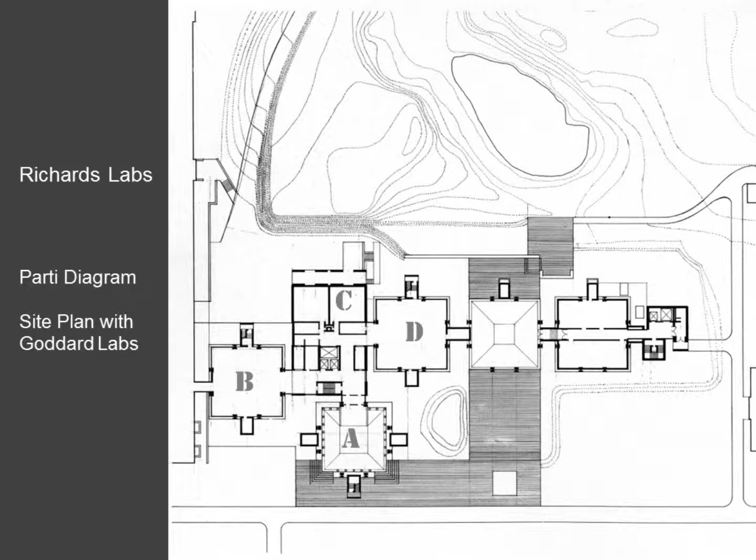But it's the idea of the servant - I'll just do it on this one side, and I apologize to the people over there because I know that's where I've been sitting. This is the servant, and these are the served. So you basically have essentially a brick box here, and these highly glazed towers surrounding it.

Okay, it's not advancing though. Okay, there we go, sorry.

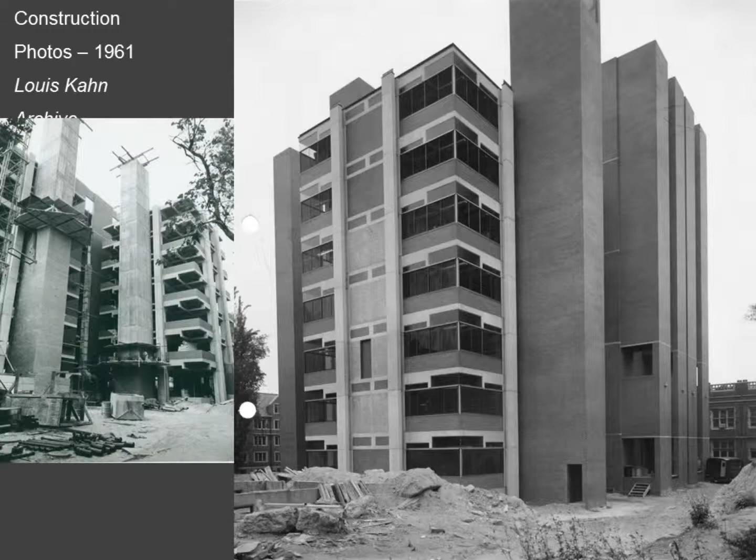Here's the building under construction. Kahn was very heavily influenced in the design of the structure by August Komendant. This was his first collaboration with Komendant, a visionary structural engineer who worked for 18 years with Louis Kahn and wrote a tell-all book about it some years ago. Here you see the building going up, and the strong expression of this reinforced concrete structure with precast Vierendeel trusses, which cantilever off the columns that form the centers of each of the served bays. The purpose was to open it up to the world at large, but also, in Kahn's notion of creating community, to be able to see into each other's lab, to have this communication that is evident in this wonderful photo by Mildred Schmertz shortly after the building opened.

The idea that these enormous windows allow light and quality to permeate from one side to the other.

Here you see the actual plan, and something important to remember, though we won't go into it in this presentation, is that the interior partition layouts within the glazed towers really were of no consequence to Kahn himself. His preference was to keep them all open.

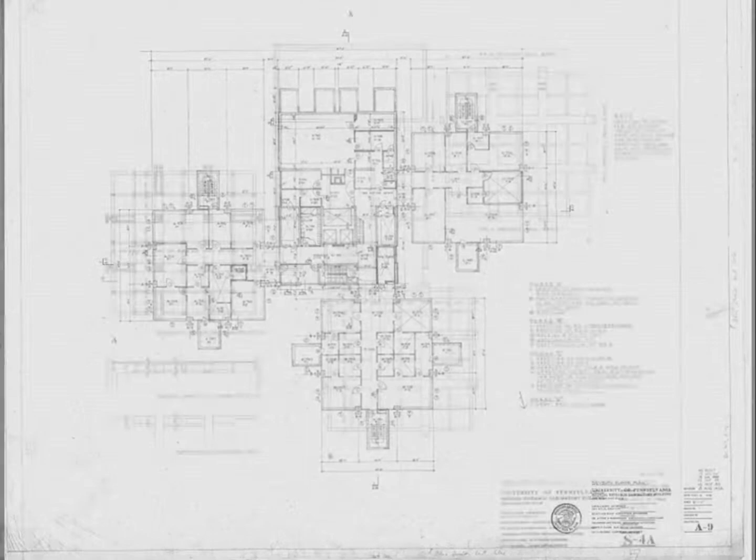However, the partitions did conform to a system aligned with the structural grid. Here is a reflected structural plan of a typical floor, and you see these four squares within the nine squares of each of the corners.

One of the things we had to face was that if you follow those lines, they don't meet Penn office standards—that's a presentation for another time—but it was a very interesting challenge figuring out how to deal with that in coming up with new schemes for the interiors of the building.

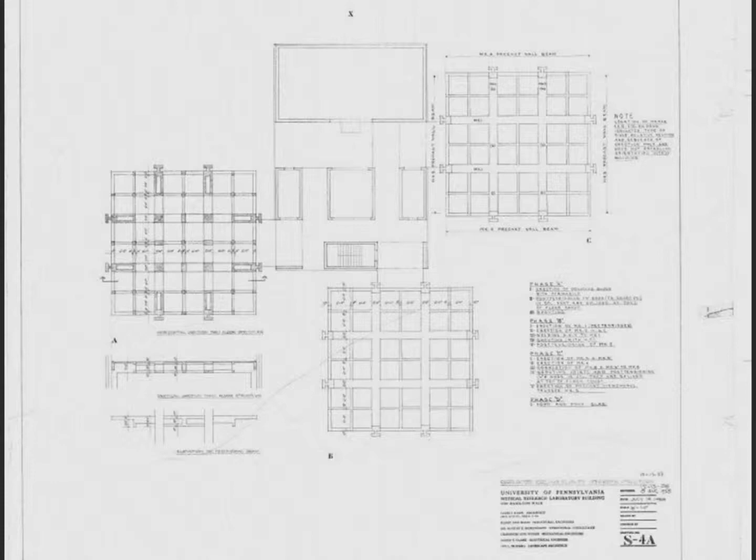And here, finally for this introductory piece, is the sort of tinker-toy pieces in construction going together. You can see the extent of the cantilevers here, and part of that movement, because of concrete creep in those cantilevers and the expansion of the brick, are some of the things we had to deal with in facing the changes to the glazing later on.

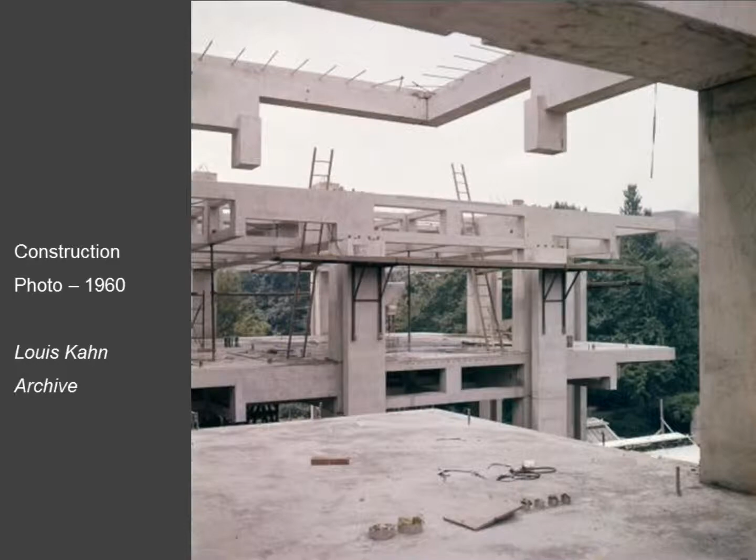As David said, there were functional problems from day one, but this, another one of these almost-construction finish photos, certainly gives a sense of what Kahn thought the spaces should look like on the interior. This is actually looking into Tower D from Tower C, so from the servant to the served towers.

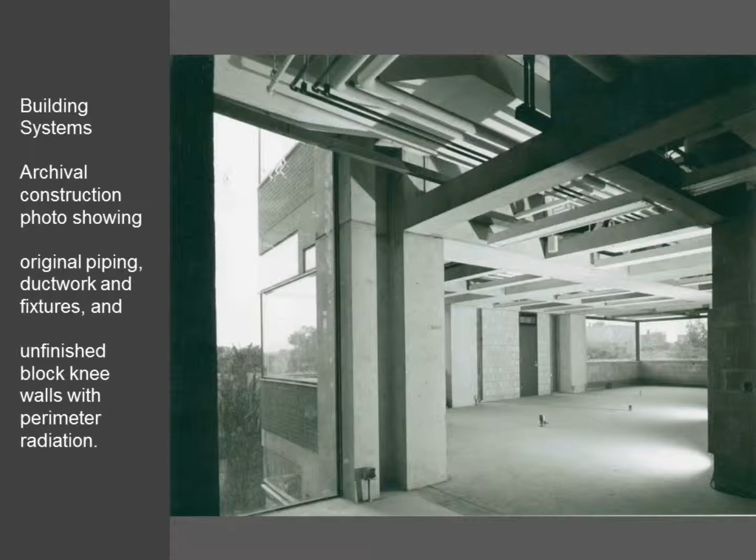You can also see in this image, in the Vierendeel truss system above, the organization of some of the mechanical systems that fed the building, which I'm going to talk about a little because it was also very important to the vision of the building. But this is what we were faced with going into the building.

As David said, this incredibly important planarity of the exterior envelope and the way the materials met each other has been partially compromised based on minor movements, particularly around the corners of the building as it relates to the windows.

A critical element of—excuse me for a moment.

A critical decision that the university made prior to our even engagement was to change from wet labs to cognitive neuroscience in this building, which took out a lot of the systems pressure on the building and allowed us a lot of freedom in terms of how we were going to design the building and its systems.

Our scope of work included an initial feasibility study and then renovation of just two floors of two of the towers. It was a limited scope, although they've now moved into a full renovation of the entire building.

Penn was not prescriptive about the solutions they wanted, but they did provide a sense of their expectations. Just from the RFP, they stressed high sensitivity and coordination between historic preservation, mechanical engineering, and space planning, and that the design should result in a high-performance, energy-frugal, light-filled, and healthy building.

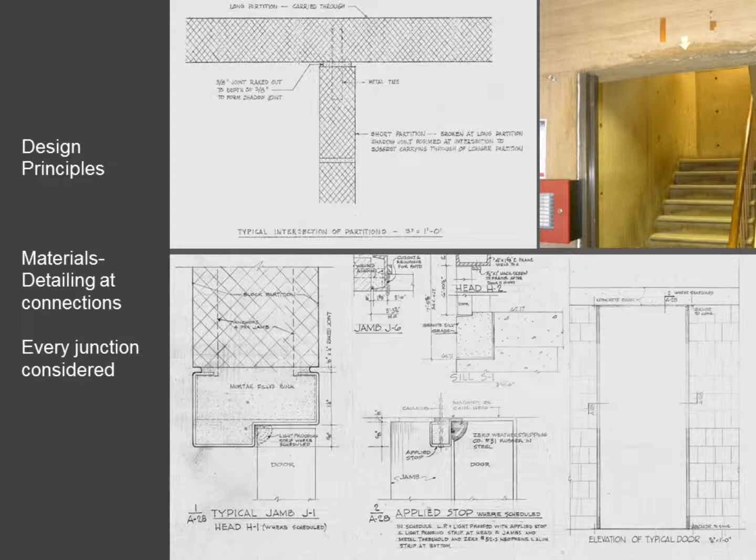One of the things we learned in the feasibility study was that to really guide us in dealing with the building, we had to think about some basic design principles that Kahn and his team developed. One of these was how all the materials in the building, the junctions between them, how they meet each other, and how they terminate. These are snippets from the original construction drawings, showing how two cinder block walls would meet, and the typical door head and window, where you really only have jambs and no head to the window. It really simplifies the lines of the building, and it was something we always had to keep in mind.

On the mechanical systems, what was really critical is that they were treated as a visual element in the building. Kahn stressed the idea that the architect should understand everything about the structure, the systems, and construction technology, because it all had to be integrated into a whole. It was not thought of as separate components.

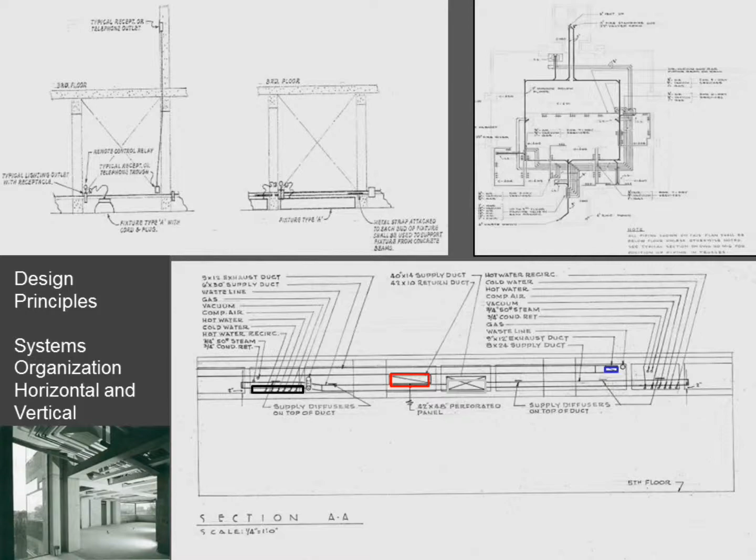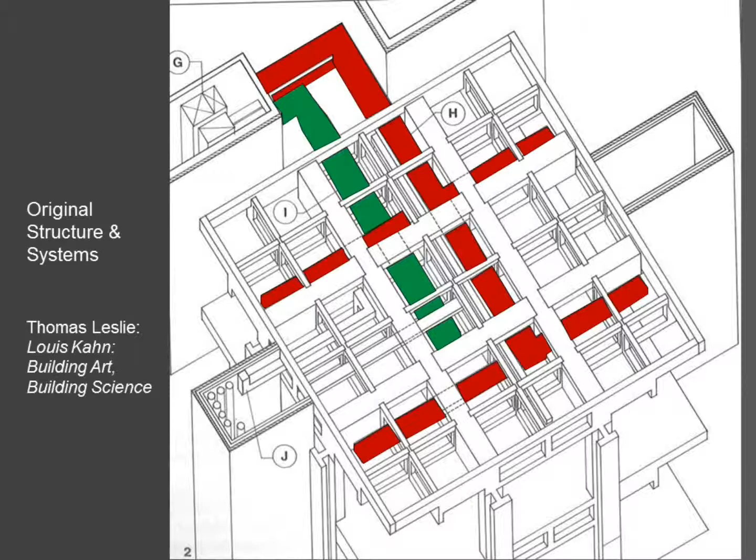The layering of the mechanical systems, shown in the section at the bottom of the screen, shows how the systems were layered in the Vierendeel trusses, one, to highly organize them visually, but also to allow the systems to feed up to the floor above for electrical and telephone, and for the mechanical systems to feed the level below. That meant no systems had to go through the zone created horizontally by the windows - a very important issue. This diagram is from Tom Leslie's book, Louis Kahn: Building Art, Building Science, and it shows the rigor of the layout of the systems and how it was worked into the Vierendeel trusses, which again was something we had to pay close attention to because we were changing the building systems, but had to think about what that meant for these designs.

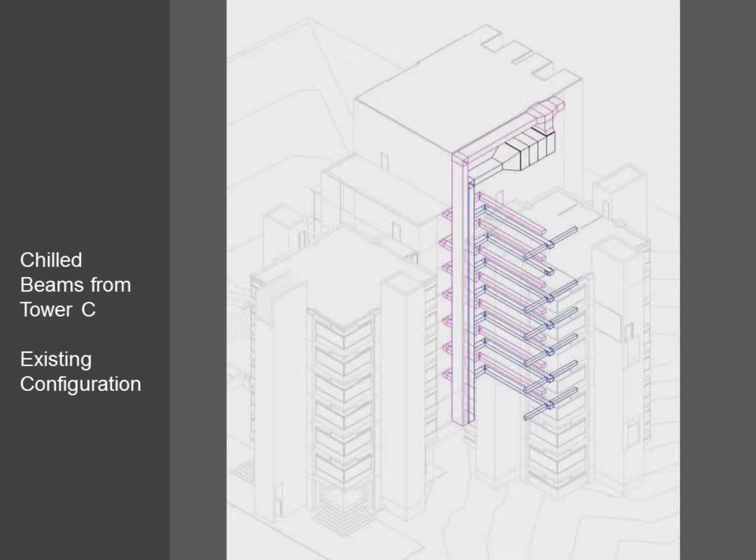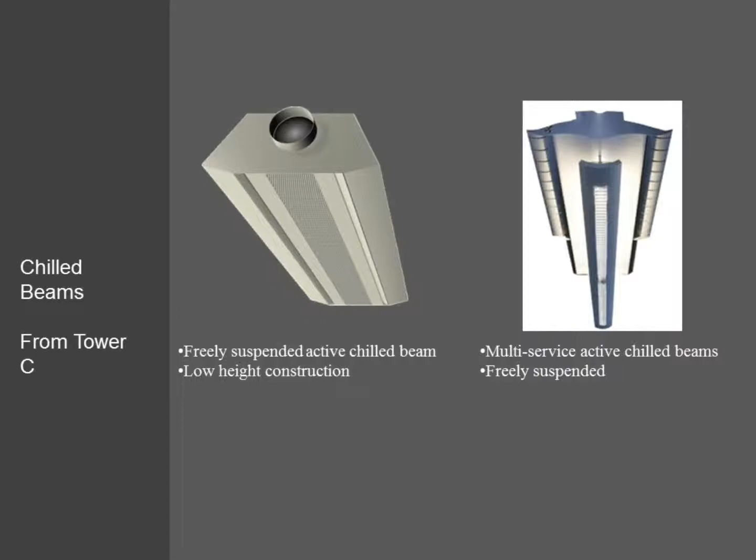One of the key things the university wanted to explore was changing from their standard HVAC VAV systems to chilled beam systems. The benefit of this was both energy savings and further reduction in the size of some of the ductwork and routing, which simplified coordination issues for us, and also had offshoot benefits specifically related to the window design. It also posed a problem, though, since we're going to have new objects in the space - what were they going to look like? There's not a lot of range of chilled beams available in the market, so again we had to think about how they would lay out in the building.

We did all of the layout design of the systems in Revit. We used it as a design tool, and we would actually use it in design meetings with the owner to understand exactly, visually, how this was going to look in the building.

Given all of the chatter happening in the 1950s and 60s about making very minimalist curtain walls, nobody really talks about just how good a job Kahn did in achieving precisely that.

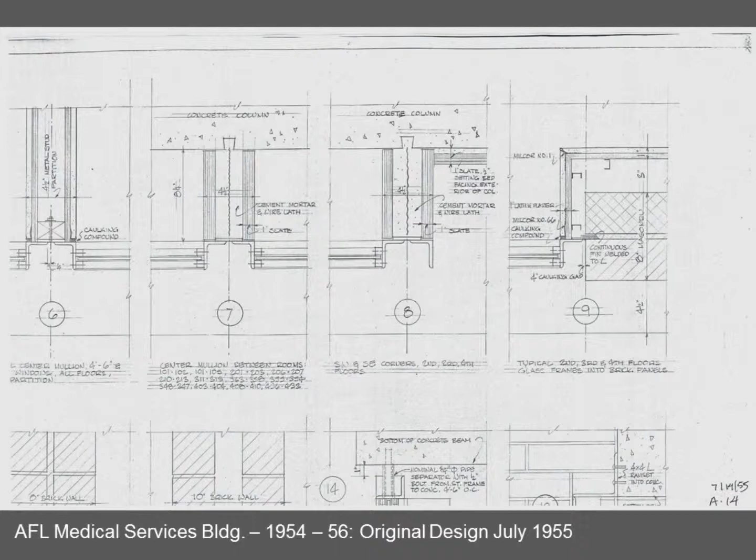These are details showing the evolution of Kahn's thinking about windows. These are steel windows in the first proposal for the AFL building, similar to the steel windows he did at the Yale Art Gallery, a building he had finished right before that. But as he's working through the design, he also proposes an aluminum alternate, and then finally goes forward with a folded plate brake metal stainless steel system.

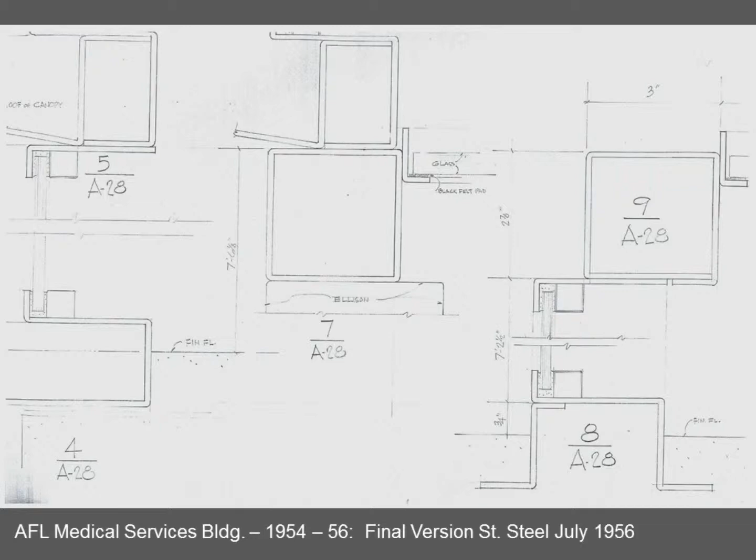Here are the design drawings, and then here are detailed drawings from the actual construction and submittals that went through into construction. So he's thinking very hard about this, working on this idea of creating this incredibly sheer surface, because there are no tubes, the sections are very light, and they get all their strength from just being folded.

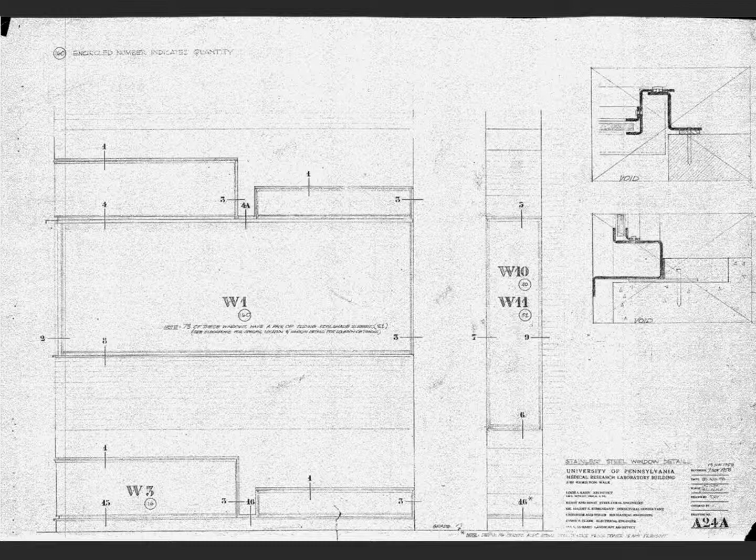The only real projection from the surface is where they had tracks for exterior shades and a very minimal drip. This shows some of the details more fully developed—you see with the cool shade on the left, that's the tracks that overhang, and this very elegant corner mullion.

One of the things people always talk about when we say we're working on this is, oh yeah, that's the building covered with tinfoil, because there was very little in the way of sun control that went along with this, and that was part of our mandate.

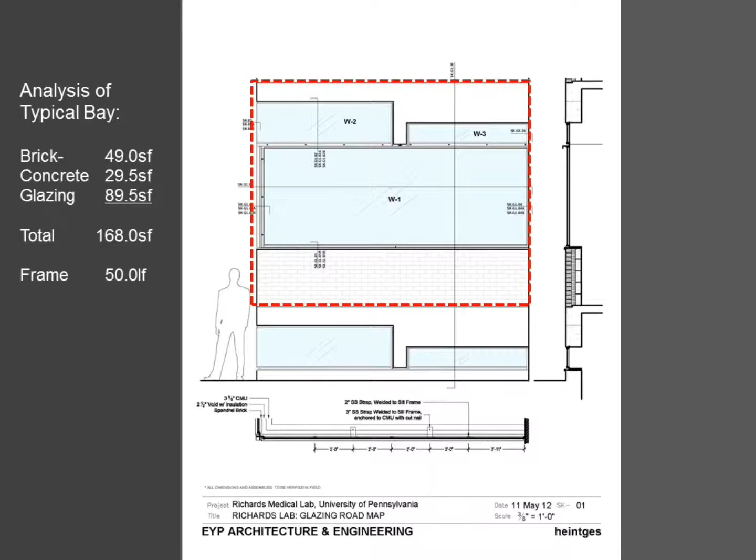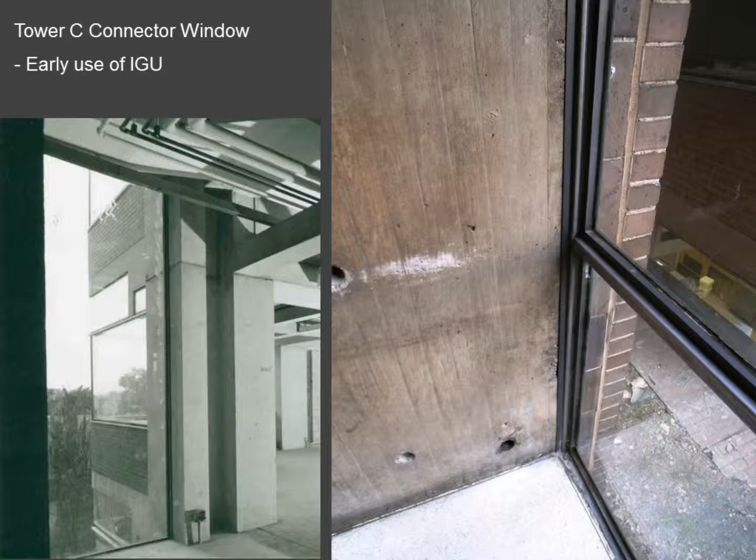One thing I want to point out briefly is that there is also, in the slots between the towers, a very early use of an IGU. These have welded metal seams, and most of them—not all, but most—have held up very well, certainly better than you'd expect a contemporary IGU being 52, 53 years down the road.

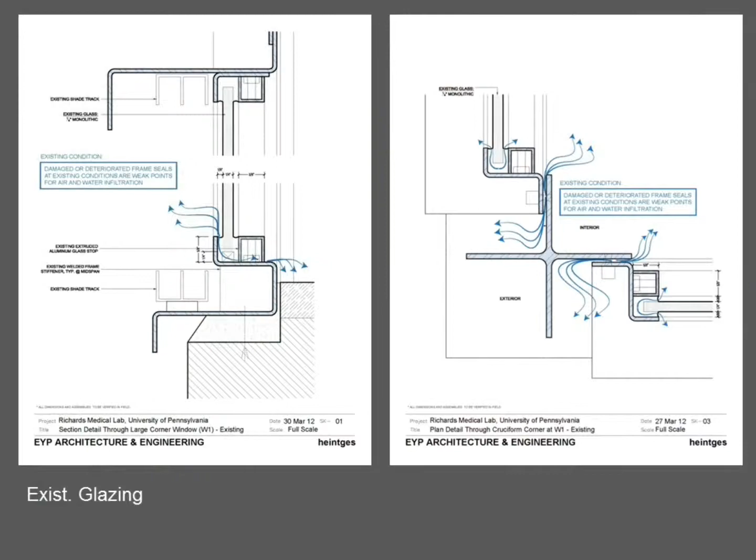Looking again at the existing condition, a typical section on the left, typical plan, with that very elegant corner on the right, and obviously a big energy sink.

One of the things we had to do, since Penn, like many institutions, is trying to adhere to a mandate to achieve 30% energy reduction in a fairly short period of time. There's a large number of universities around the country that have signed on to this, and they're looking at every project with the idea of what can we do to be as frugal as possible. They weren't demanding, but they said you have to explore every alternative.

So we did look. We said, okay, can we somehow mimic these profiles in a thermally broken frame? Well, there are three problems with this.

One issue is the frame is a little bulkier, or maybe way bulkier, than we would want it to be. Two, and most important, you're having to rip out the original frame, which means you are disrupting both the concrete frame and the brick infill around it. And three, you still have the problem at the corner of the lack of a thermal break. So it's never going to be a perfect solution.

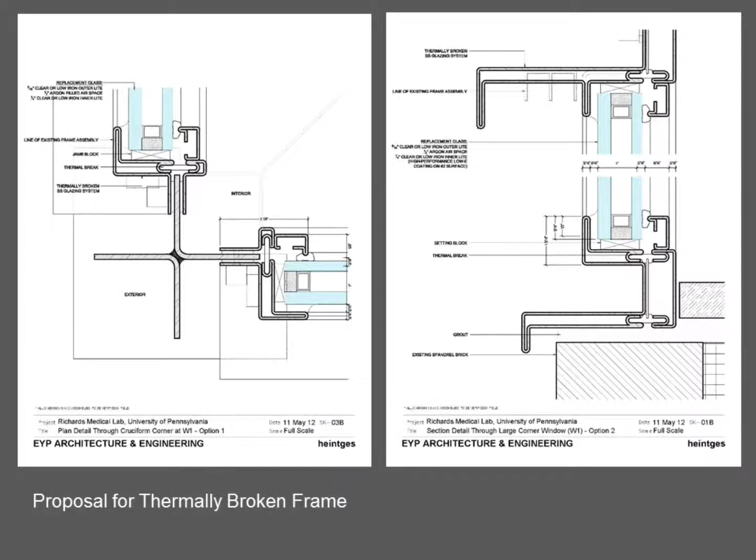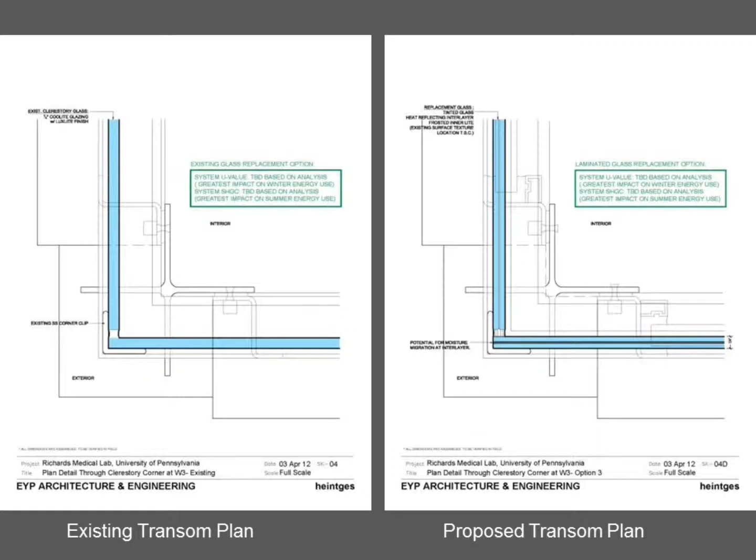Here at the transom, one of the things we had to deal with with the laminated glass, which you see on the right, was worries about the possible exposure of that piece of film at the intersection between the two lights. We did some testing on that, and it was determined not to be an issue with the glass, so we went forward with that.

Just quickly, we did do energy analysis on the building overall. Our engineers really drove this, and it was helpful in helping Penn come to grips with the decisions they had to make. I didn't mention before, we had a number of constituencies at Penn. We worked for Facilities and Real Estate Services, where the campus architect's office is, but the building is occupied and essentially owned by the School of Medicine, so the funding for the project came from them, and their priorities weren't all the same in terms of what they were trying to achieve. We did a study of different ways of looking at the building in terms of systems and glazing, and this was an early pass at understanding what kind of energy reductions we were going to get from the design. The one on the left was the existing energy usage, and the one on the right was using chilled beams with IGUs.

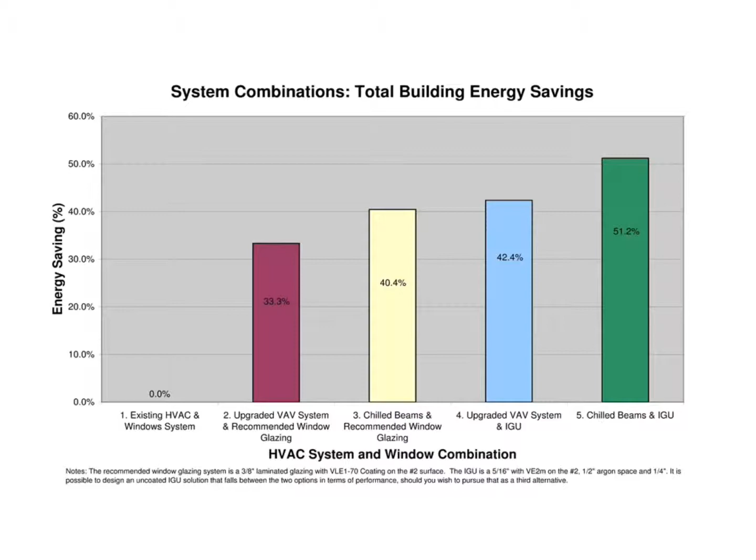You could see that's obviously the best option in terms of energy reduction, but the difference between that and using chilled beams with laminated glazing wasn't significant enough. The greatest energy savings came from the mechanical systems upgrades, not from the glazing. So this allowed Penn to sit back and think that maybe the preservation issues in this case were enough to drive the decision, because they were getting significant energy benefits from the other elements of the design, and that satisfied them.

We also did testing on the windows. We wanted to understand whether we were really achieving the improvements we were planning on. So we did both air and water infiltration testing on the existing windows, and I always like to say that they failed magnificently. For air infiltration, based on the size of the window and the configuration, we would be allowed about 18.5 CFM as an allowable for a window installation. We were over 35, and they could barely get that because they couldn't keep enough pressure in the chamber to figure out what the number was. And on water penetration, the test is supposed to run for 15 minutes.

We stopped at 4 minutes, 15 seconds because we were probably going to flood the lab space below. The good news is that after the mock-ups were done, we retested the new installation, and the CFM is down to below 1 CFM, well below what is allowable.

Water penetration testing identified some weaknesses in workmanship that we were going to have to deal with in full installations, but really was at a level low enough that positive pressurization of the building with the mechanical systems would deal with that, and it was not going to be an issue.

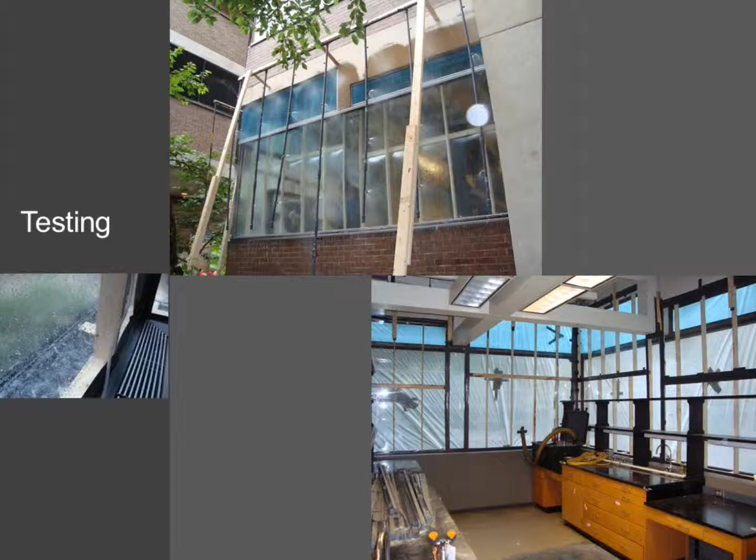So now we're getting to the actual mock-ups and installation. The first thing we did was look at the glass itself. Because of the scale of these lights, we decided to make the glass choice prior to fabricating the full 14 by 5.5 foot units.

We worked very closely with a couple of glass manufacturers, eventually settling on Viracon. We looked at both the VLE 70 and VLE 85, looked at combinations of low iron and clear glass against two layers of clear glass and the laminate, and finally came up with the closest match being the VLE 70 with low iron on one side and clear glass on the other side. Virtually identical to the original in appearance, but much, much more robust.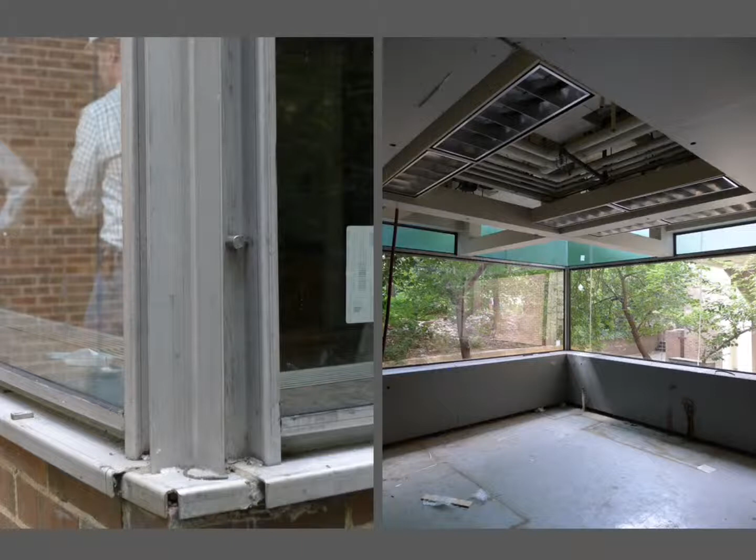Then we also looked at the restoration of the steel itself, looking at that corner. The steel was in excellent condition. There was no corrosion to speak of, and really the only thing we had to do with it was lightly clean it, because it has this very matte finish—a finish that Kahn would grow increasingly fond of as he worked through his career. This very, very almost pewter-like stainless steel finish.

So it was really just a matter of repassivating the areas where we were going to be reglazing and doing a very, very light cleaning on the rest of it. Then on the right, you see the first full corner mock-up, two lights of glass, two of the big lights, and all of the transom lights.

Looking up at the corner, there you see it without the clips. The reason we decided not to use the stainless steel clips is because they were not part of Kahn's original detailing. They were done for expediency because of concerns about how well that corner could actually be sealed, and we didn't feel it was honest to put them back. They would be purely decoration.

We felt, frankly, if anybody feels strongly enough about it in the future, you can go up and glue them on, which is all they'd be anyway. But the technology used to butt glass these days is far advanced from what it was in 1961, so we felt quite comfortable leaving it the way it is—a more honest approach.

There was a lot of discussion about exactly how to set these windows. We tried initially to do a mechanically fastened stop on the inside. We spent literally hours in the field arguing over 1/8, 1/16 of an inch tolerances and dimensions to try to get this to be just right.

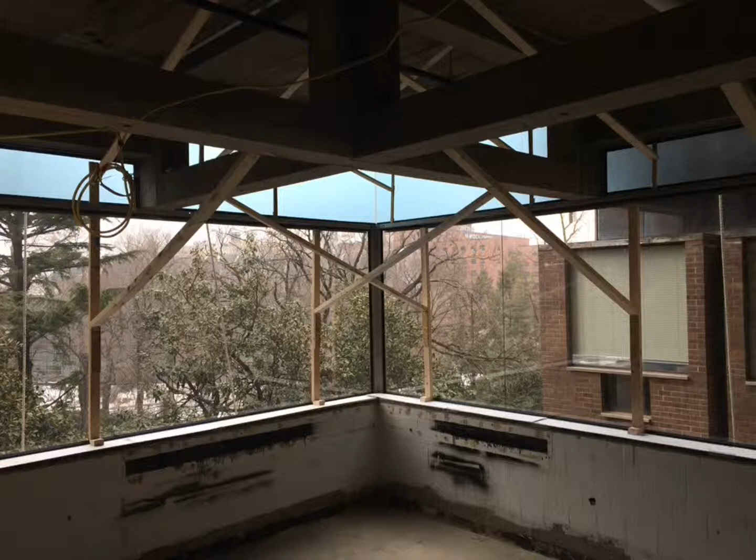And here's where we are today, where the windows have been installed. They are temporarily braced until we get the stops in, just as a matter of precaution. But really, the building from the outside doesn't look any different—it just looks a little bit cleaner. I think once we're done on the inside, the differences, if you're going to notice any, will be elsewhere in the building and not in the glazing. Thanks.